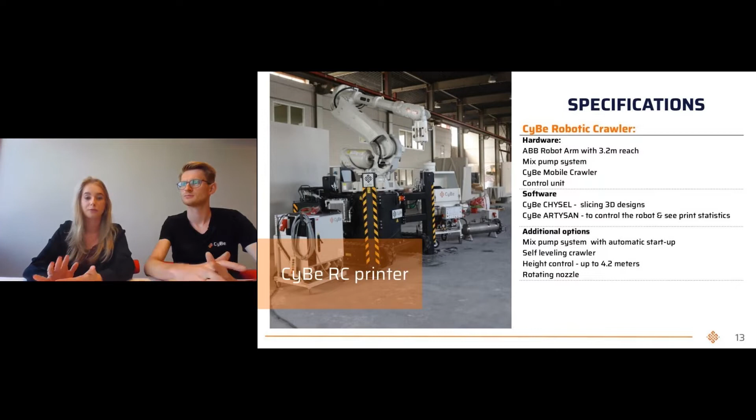But maybe what is more interesting to see is the speed that we can print with our robotic crawler. Because what we think is...

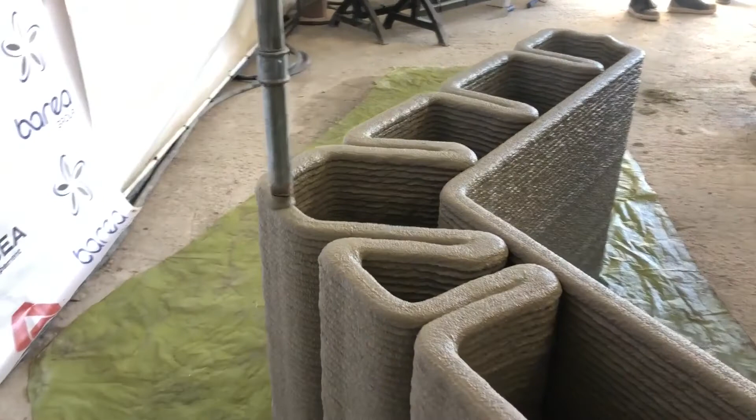Sorry, I think the sound just got cut off, but what you just saw was a video of one of the projects that we've been printing. So this is one of the wall elements.

What is very important about the strategy that we use with the robotic crawler is that we can print at a very high speed due to our material.

We can print at a printing speed of 500 millimeters per second, as we have developed a material which sets in 3 to 5 minutes. We've done this together with our partner Korodur, which is a German company. In 2013, we developed the material which allows us to print at this speed.

So we have a different video as well, which also shows you the speed that we're printing. Within that, you can also see the way we construct a wall element by placing the reinforcement elements already into the wall by printing, which reduces the time that it needs afterwards. So we'll look at this video as well.

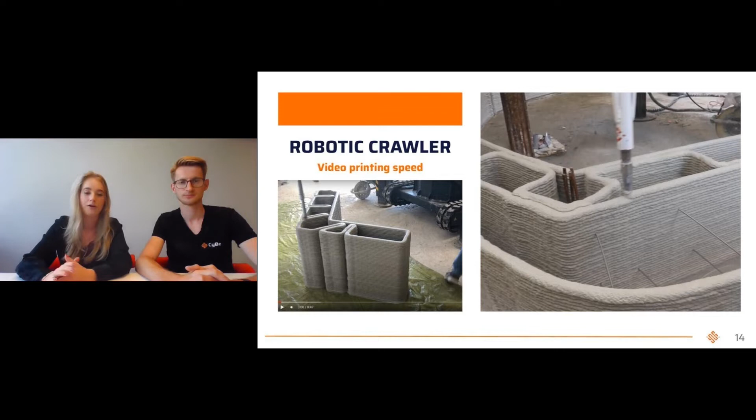So what is the range like of a robotic arm? We receive a lot of questions on how to visualize the range of a robotic arm. You can see here in the building, it's like a donut form, and the printing range is 5 meters by 3.5 meters.

This is possible because within our software CHYSEL, we have the printing on an angle possibility, which basically allows the robotic arm to print on an angle instead. So it can reach the corners, which allows the print operator to reach a different angle and a longer extendable reach, for example for longer wall elements.

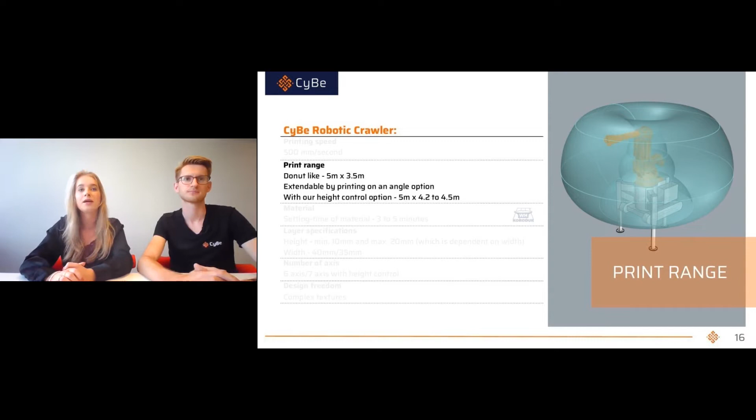And also with the height control option, this is the extendable option by means of height, so you can print higher elements if that is required. This is another option that allows us, by having a material which is fast setting - this is a very important part that we have developed. As Jesse mentioned, the elements can also be hoisted after 24 hours, so this allows you to keep up the speed and the pace of producing the wall elements.

The layers that we print with the robotic crawler are variable. You can print at a height of a minimum of 10 millimeters up to 20 millimeters, and we see that the perfect average is 12.5 to have the perfect consistency of the layers.

The width will be around 40 millimeters to 35 millimeters. This depends on the nozzle that you use, but we most frequently use the 40 millimeter nozzle as this gives you the perfect layer outcome.

The number of axes on the robotic crawler is 6, but if you use the height option, this will be 7. What's very important about the robotic arm is that it allows a lot of design freedom, so very complex textures can be printed. The preciseness of the robotic arm, in combination with our fast-setting material, allows us to print many different designs and textures without using extra amounts of material.

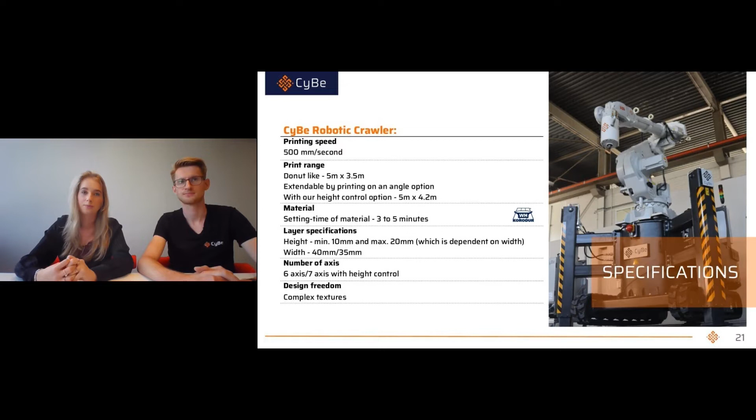What you can see here is maybe good to visualize what we mean by the height control option. We're going to look at a video in which we're printing an element. If you look at the white round, you can see that the level of the crawler itself is extending during the print. So we're going to take a look at that.

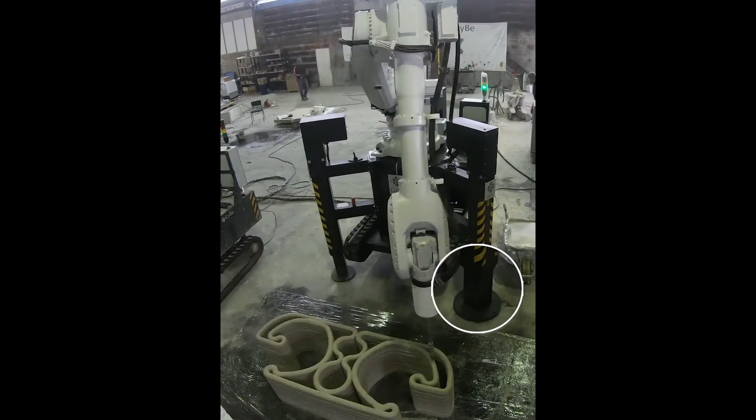We also have a different video in which you can see the printer itself extending. So we'll take a look at that as well.

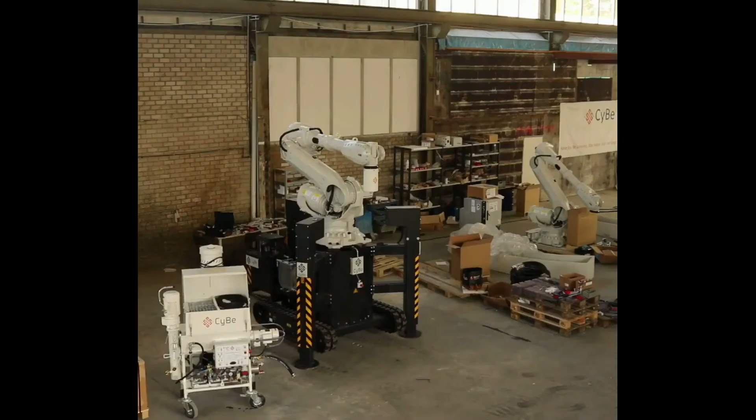The video was sped up so the printing arm was going very fast. In general, it's a bit slower speed, so don't worry.

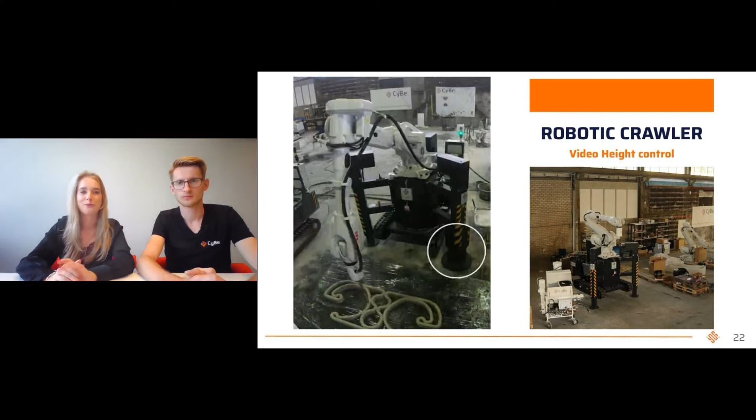For the robotic crawler, the pricing is starting from 195,000 euros. Based on the experience that we have had with the different types of usages for the robotic crawler, we have developed different packages. What we want to reach with this package is that it's easy for our customers to know what needs they have, as the additional options that we offer can give some questions. So we have divided this into 3 packages: the Basic, the Pro, and the Pro Plus.

Basically, what we have in the Pro Plus is all the options that we offer. So if you want to have the full efficiency and full easiness of using the machine, such as the automatic startup, this includes the height control and the self-leveling option as well. That's when we advise the Pro Plus.

But of course, if height control is not a necessary option, if you only want to print wall elements from, let's say, 2.8 meters height, then the Pro is a perfect package for you to choose. And the Basic includes all the basics.

So then you should think of the robotic crawler with the necessities: the mixing pump system, the software that we include. We include training as well, because this is always something we think is very important, so this is always included from our side. And of course, the service level agreement that we have is also always included, as we want to make sure that we can guide our customers through the printing process. So this is basically how the pricing for the robotic crawler is divided.

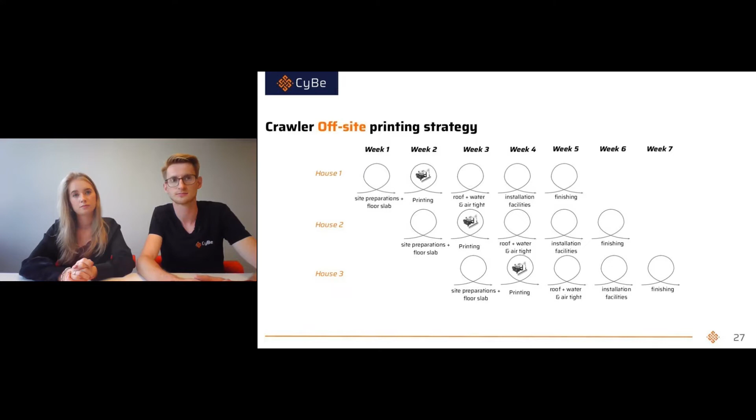So there was a small introduction about the overall effectiveness of our equipment.

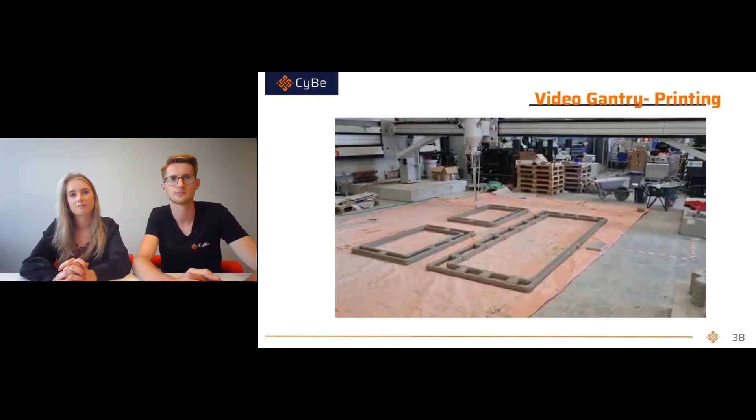So the gantry system can be placed on multiple locations. It can be set on site, on the construction site, or precast off-site. It can also be used for printing, for example, foundations or formworks, in which you have a reduction of materials because you don't have the wooden formwork. It's just concrete, so that means less waste of materials.

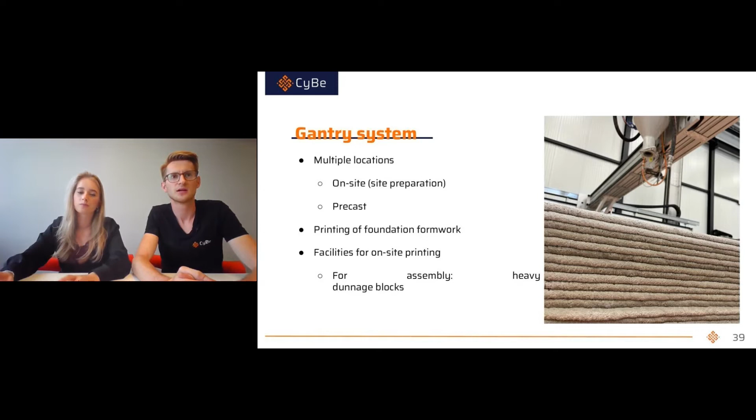For the facilities that you need for on-site printing, you need a heavy crane, because the elements of a gantry system are heavier compared to the robotic arm. So you need stronger hoisting materials, for example, or a heavy crane.

So for the overall equipment effectiveness of a gantry system, it depends on your printing strategy. If you want to use your gantry on site, you have less printing time. That means you can print, for example, for 1 week.

But if you will print for 1 week, before you can print you have to assemble the printer itself, and that will also cost 1 week for assembly. And also after printing for 1 week, you can disassemble the printer, and that will also take 1 week. So that means your equipment has less effectiveness, because the percentage of printing time is, for example, 30% if you have 1 week of assembly, 1 week disassembly, and 1 week of printing.

For precast, it's another printing strategy, and for modular construction, you can raise the effectiveness. That means that with another printing strategy, your printer can print more time. And more printing time means more elements, for example, that can be built.

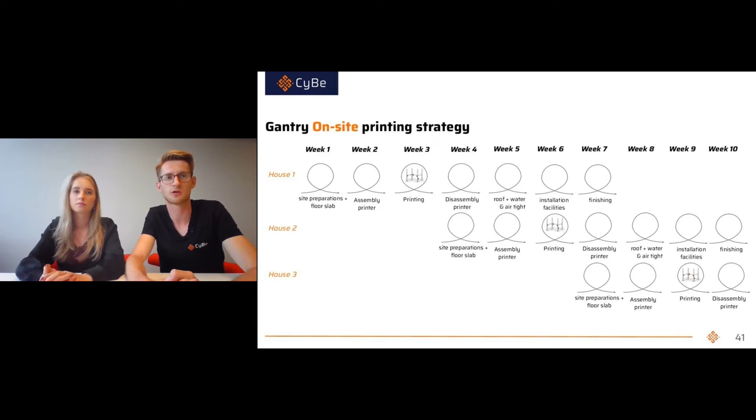The printing strategy for on-site construction, for example a multi-story building, will be also the same. You have times between because you still have the assembly of the printer. But here, if you have printed the first floor, you make the floor slab, but you also have the curing time. You have to wait for the curing time of the floor slab before you can print the next layer. So for the second floor, the printer is standing still waiting for the floor to cure, and after two weeks you can start printing again. For the third floor, the same story.

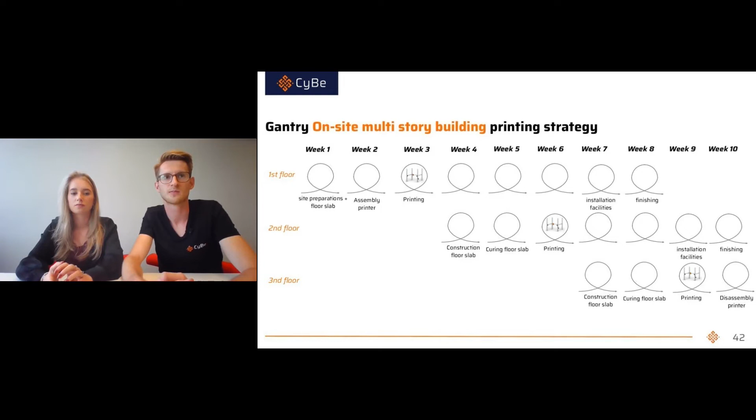We think an effective printing strategy would be using the Gantry system off-site. That means you still have the printing time of a week, but if you can move the elements away from your facility, you don't have the assembly and disassembly time of your Gantry system. So the first week, the printing of the floor slab of the first house can be done. In the second week, the elements can be printed and hoisted to the location. In the third week, the house can be finished, and the printer is already printing for the second house, and so on.

So it's a big difference in printing effectiveness between off-site printing and on-site printing for a Gantry system. That's really important to keep in mind when using a Gantry system.

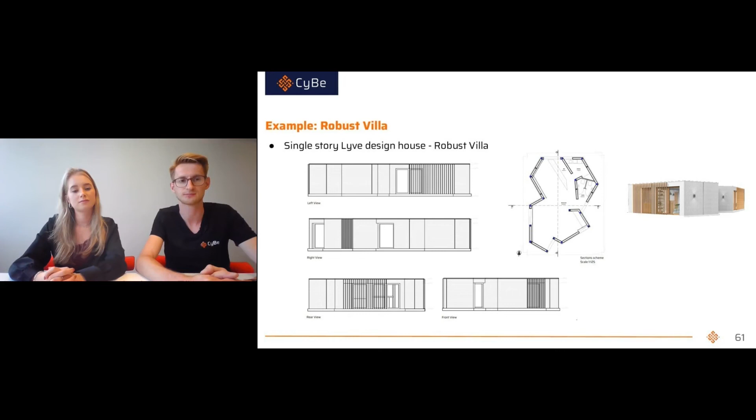Total construction of 5 weeks. We calculated this with the loops - 5 weeks construction and 1 week of printing time. We built it in 1 week, but we prepared it so you could print multiple houses with an efficient printing strategy.

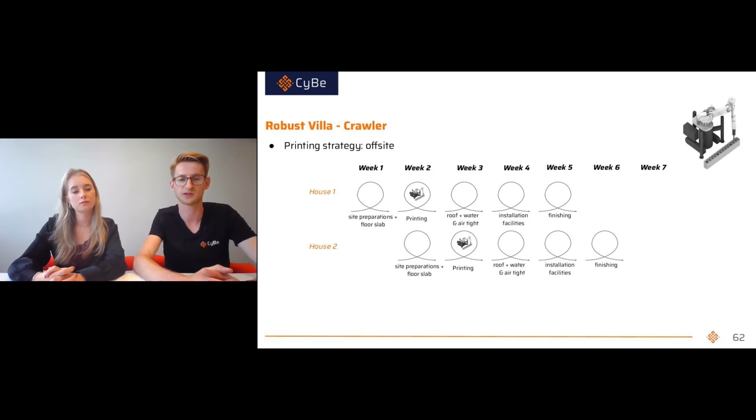In this situation, we printed it off-site, but it would also be possible to print it on-site. So you have 1 week for floor slabs, printing 1 week, and after the 1 week of printing, the printer could be driven to the second house for printing there.

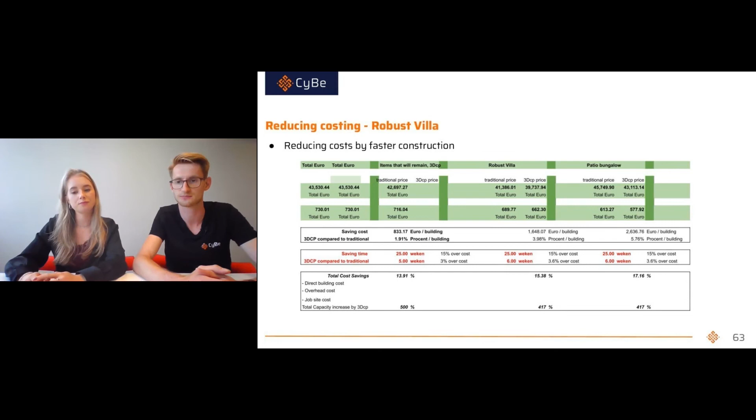With this, we could reduce the time of construction from 25 weeks to 5 weeks. That means faster, also cheaper construction. So for the conclusion of the Robust Villa, in this case, for the one-story single house, the crawler system was a very effective printer with a high overall equipment effectiveness.

In this situation, we chose to print with the crawler. For the second case, we have our Marco Polo project, which will also print 3 row houses in Eindhoven, Netherlands. It gives an example of how to print a multiple story building.

For this project, we think it's more effective to print with a gantry system, but not printing it on site - printing it off site in our production facility. Because we can print it in our production facility, we can do it in a modular way, and we can use our printer for only printing, without having to take into account assembly and disassembly time.

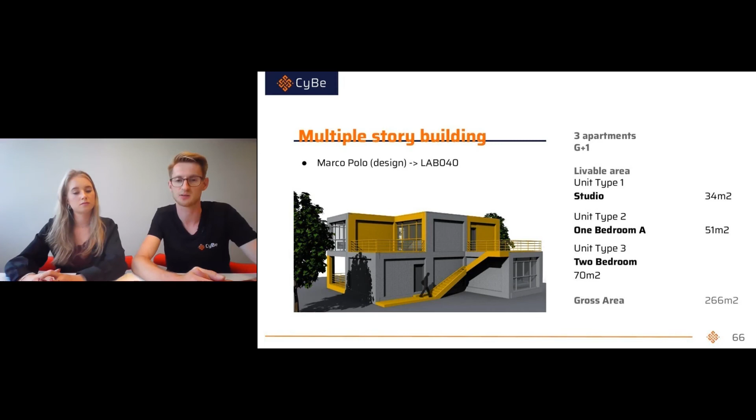So here you can see the principles of the house. We are going into the concept of these houses in the upcoming webinar in December. These houses - this is a multiple story building, but it could be also for higher buildings, for example apartments.

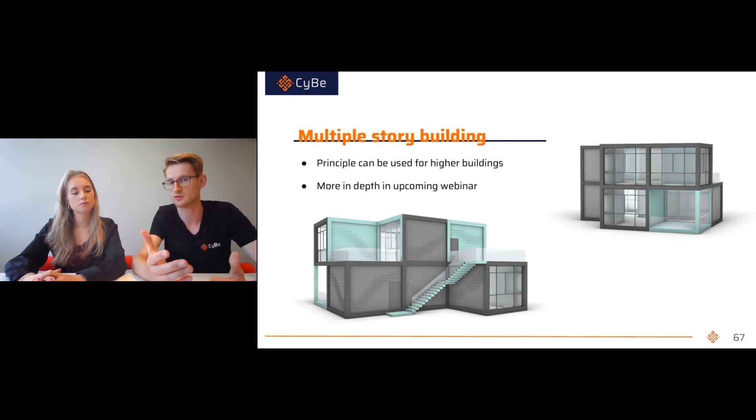So for the Marco Polo project, in this situation, the 2-story single house was more effective with a gantry system than with a crawler. More about the technology of the Marco Polo project in the next webinars.

So we're wondering about your opinion - do you think there will be more on-site or off-site printing in the future? And I see that we have only 5 minutes left for today, so I think we will go soon to the Q&A.

So what you see in this case is that the equipment you will be using will also very much depend on the design you will be printing. In this case, we have developed for each type of system its own housing concept as well. So the Robust Villa design that you saw for the robotic crawler is designed differently than the concepts we use for the gantry system.

Because we want to provide an all-in-one solution, these are the designs that we also provide on our library platform, so that we can guide our customers by creating ready-to-print designs. We can do the design and engineering, and these can be retrieved from this online platform so that it's ready to be printed. Besides that, we also guide customers through the design and engineering process, which we see is a very important factor as well.